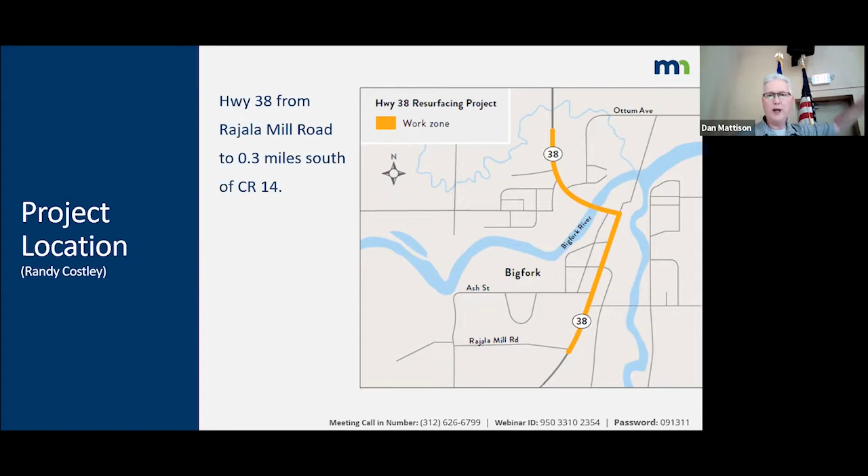As far as project basics go, the project is programmed right now to be let in April of 2023. With that letting, we would anticipate that the construction is going to happen over the summer and the fall of 2023. And the type of work for this project, it's classified as pavement resurfacing and rehabilitation with bicycle and pedestrian improvements that are triggered by working on the pavement. The funding for the project is state funds, and the construction budget is $2.5 million.

The city will have a cost share in the project, including things like a percentage of the parking bays, repairs to the lighting system, fire hydrant relocations, water valve adjustments, sewer manhole adjustments, and stuff like that we'll encounter as we're doing the construction. That's not an exhaustive list, we're not sure exactly everything that the city has that will be impacted, but that's kind of an overview. The procurement method we're going to use is design, bid, build. So we will do a design, advertise it, receive bids, and go that way.

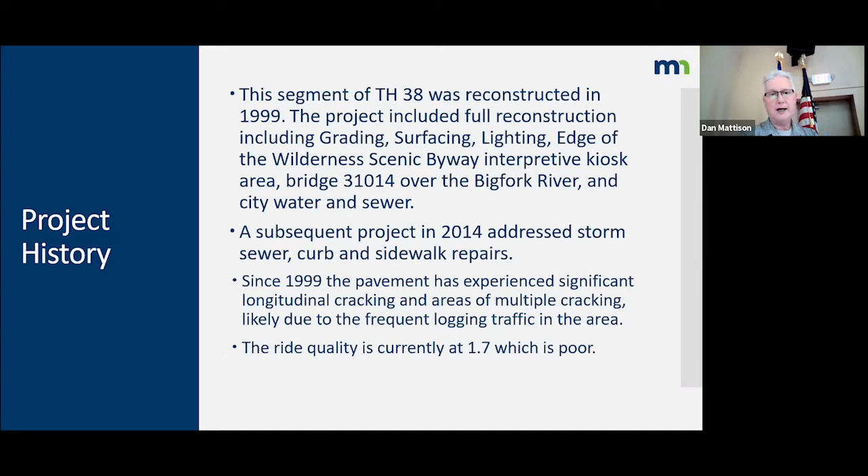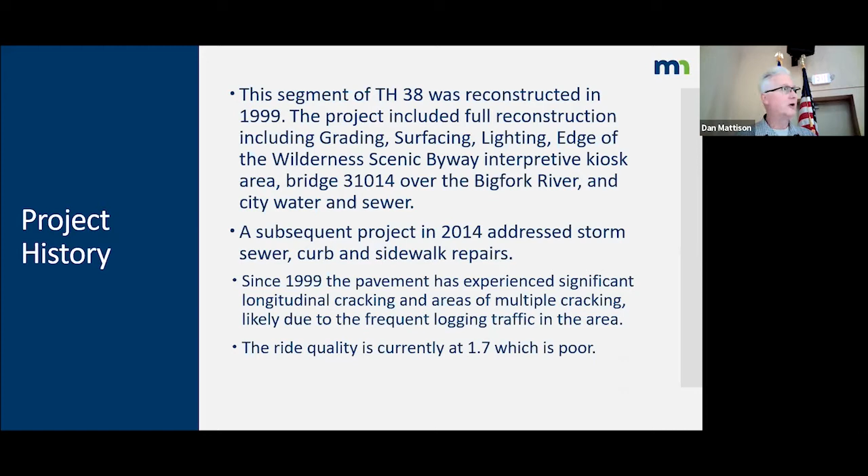As you guys are the people using the highway, driving on it all the time, you know that the highway is experiencing a significant amount of cracking, and we figure it's likely due to the heavy duty traffic it gets. Logging trucks and other types of stuff are wearing out the pavement. So currently we have a ride quality of 1.7, which puts it in the poor category for ride.

Due to that poor ride quality, this segment of Highway 38 came up in our program, and it was programmed for this rehabilitation work in 2023.

MnDOT started scoping in 2018. As we got into that scoping process, knowing the impacts that we had on the pavement would trigger that we have to relook at the ADA accessibility of the curb ramps, it was determined that all of the bituminous pavement, all of the flush concrete bump-outs, and all of the sidewalk and curb and gutter was just going to be removed.

We're not going to get into the grade below that. We're just going to remove the surfacing, and then put all new surfacing back down, or limit the amount that we get into the base underneath.

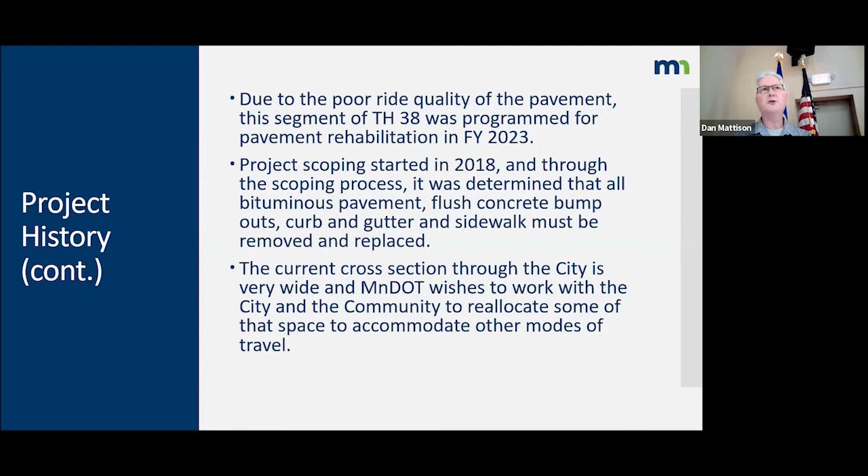The current cross section through the city is very, very wide. One of MnDOT's missions is that we need to serve all modes of travel — we can't just concentrate on vehicles. So one of our goals was to work with the city and try to come up with some ways that we could reallocate some of that extra width to accommodate other modes of travel.

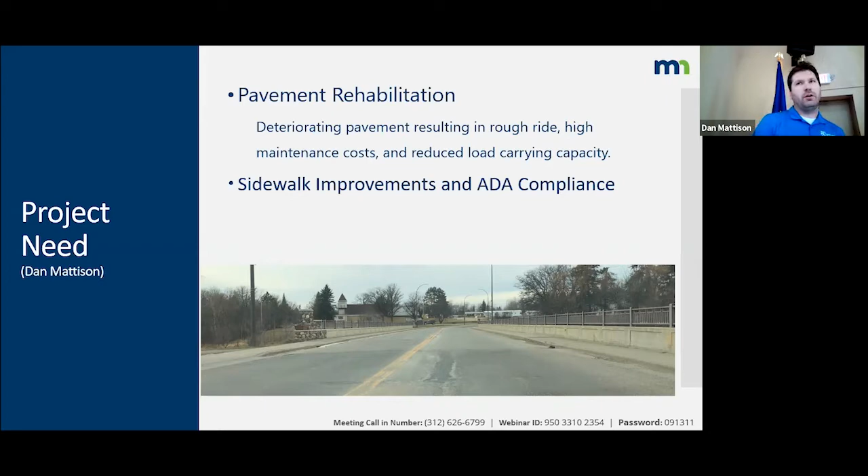So what is in this project scope? We'll be looking at repairing the lighting system through town, evaluating the highway cross section, which we did with the presentation last time. We're looking at new sidewalks and curb ramps all the way through town, replacing the pavement surface - not getting into the road grade - and evaluating the commercial driveway width through town.

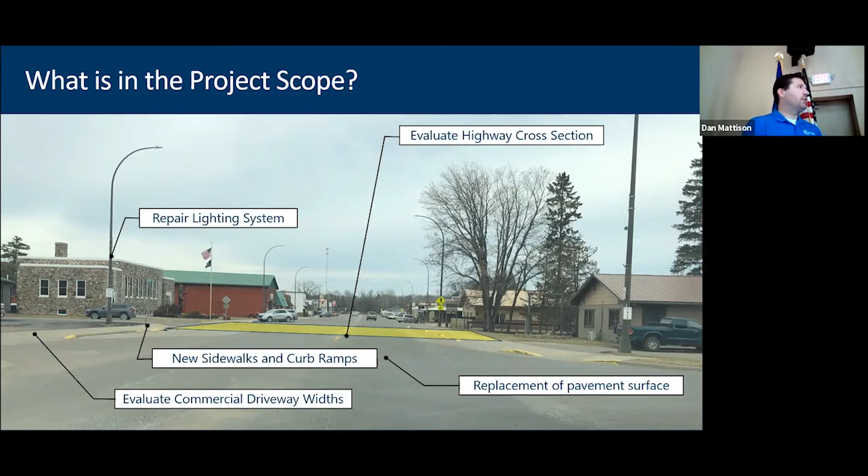The previous open house was in April. We presented 4 concepts to the public and took comments both in person and online. The comments received were pretty consistent through town - obviously the comments differed per concept, but mostly what we heard was we like it the way it is in town. We had presented back-in angled parking, and that was pretty unpopular - I think we only had 1 vote in favor, and I don't know if that was one of the MnDOTers in the room. But everybody else did not like back-in angled parking, so that's out of the project.

So we took that feedback, worked with the city, and MnDOT directed us to move forward with this preferred alternative that's here. Let's walk through what's in this preferred alternative.

First we'll look at the section north of the river. This is the section that'll mostly look the same as it is today - rehab pavement surface, we'll extend some curb and gutter and sidewalk a little bit further north. But essentially what's out there today is what will go back.

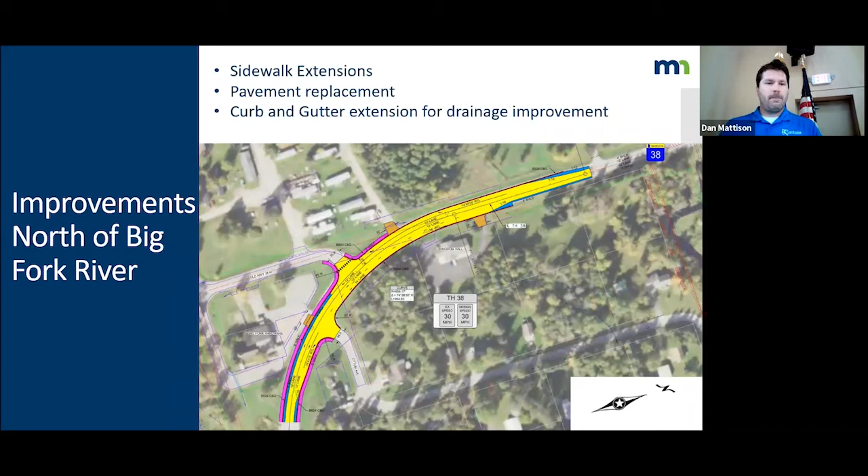Actually, if we could back up, I did want to address the bike lanes here. We did present bike lanes at the last open house, and it received some positive feedback, but also some negative. So we were ready to potentially move forward without doing something with that extra space. But there's MnDOT policy that does not allow MnDOT or the state to pay for unwarranted pavement in a cross section - anything beyond the 12 feet of driving lane. That space needs to go somewhere. If it doesn't go to a dedicated user, like a biker, or sidewalk, like a walker, and it remains drivable surface, by state policy that cost would fall to the city.

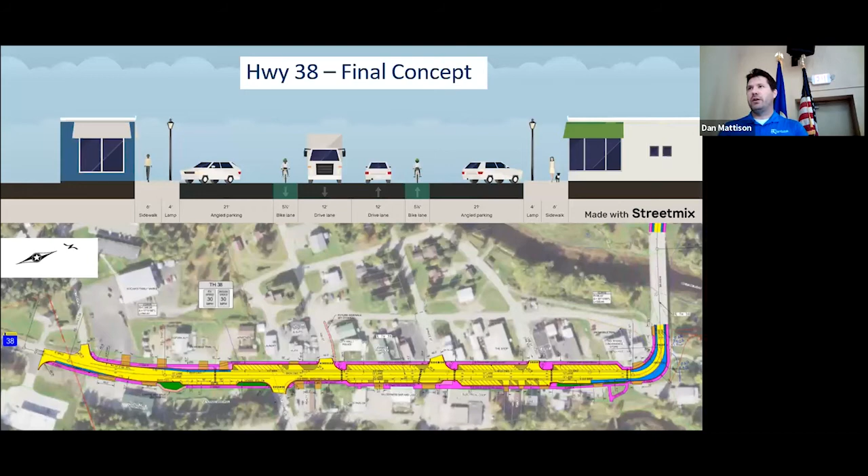The expected construction impacts on this project will be constructed under traffic by shifting traffic around, and when I say traffic, I mean also pedestrians. So some sidewalks will be closed at certain times, lanes will be closed, parking will be closed at all times or at certain times, and we'll be shifting traffic around to maintain use through town.

We expect this will be a one summer construction. We have to get through design and confirm that as we're going through some of the design questions.

Access to businesses will be maintained at all times. It may not be convenient at some times, but it will be maintained at all times. Lanes will be shifted and some parking will be removed during construction and placed back after.

Alternative routes for pedestrians will be used and signed. So if we do have a sidewalk closed, they'll be directed across the street, across the block, and they'll come back across to get around. As we iterate design and get into what's called final design, that's when we get into the details. More information will be available online and to the public at that time.

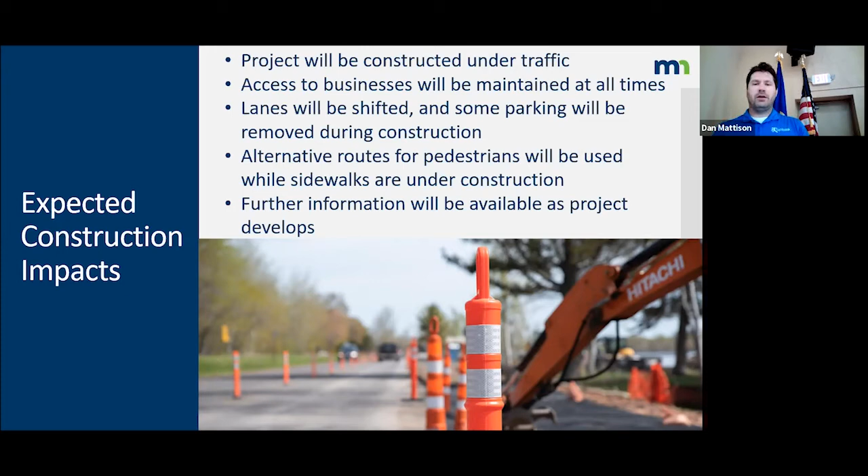So what is the schedule for this project? We kicked off design of this project in March. We developed and presented preliminary concepts in April. We had our first open house right at the end of April.

We developed the final design concepts through May and into June, meeting with the city several times and modifying based on concerns the city brought up, both for maintenance, business access, and other items. As that design develops toward a preferred alternative and final layout, there are still things we may tweak here and there as we get to that final selected layout.

Part of that is the feedback we may receive tonight. There may be some things we still need to move around or tweak based on feedback today. So today, end of June, is open house number two. Beyond this, our goal will be to finalize this layout over the rest of the summer.

We'll be working with the state, several offices within the state, as we develop that final layout, which is essentially what's on that table over there. We'll ask for municipal consent from the city based on that final layout this upcoming winter. That's an administrative process where we'll again present this concept to the city formally, and they'll formally give us consent to move forward with the project.

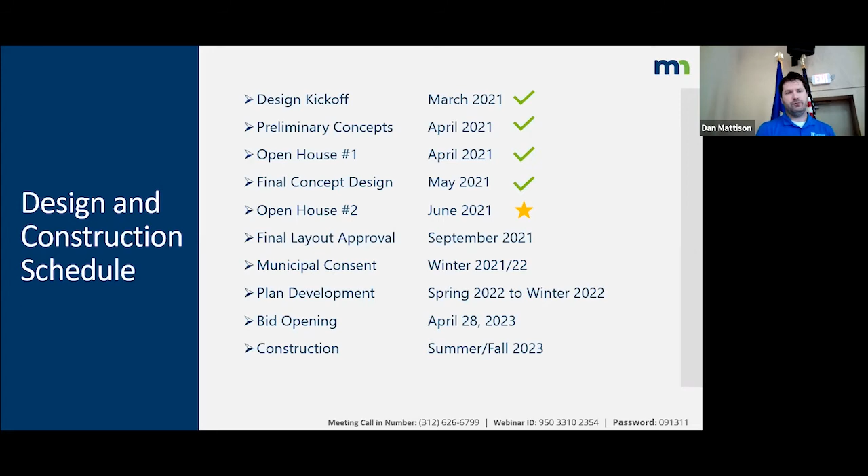I'll hand it back over to Dan, and he'll go over how to leave comments on the website.